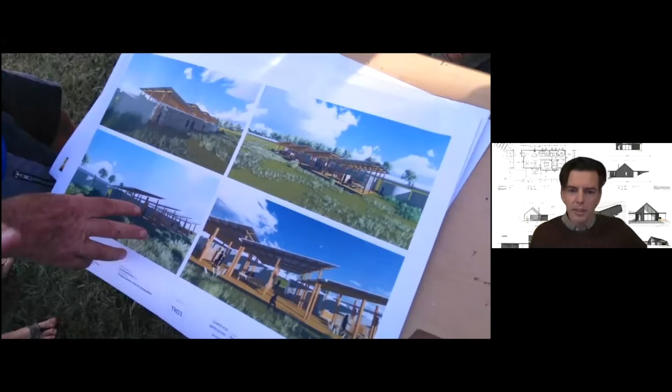Besides architecture, I organize various events like this architecture festival, kind of learning experiences for students and other architects, and building various assets for communities that might otherwise not get built - community museums, tourist hubs, things like that. Typically pro bono projects, halls. This is a little high school in Cambodia, a charity-driven project.

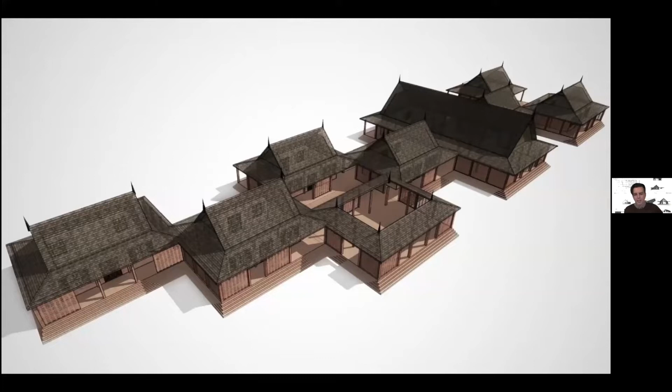And yes, that brings me to Architects Assist, which is an initiative of several hundred architecture firms in a bid to assist those affected by the recent fires.

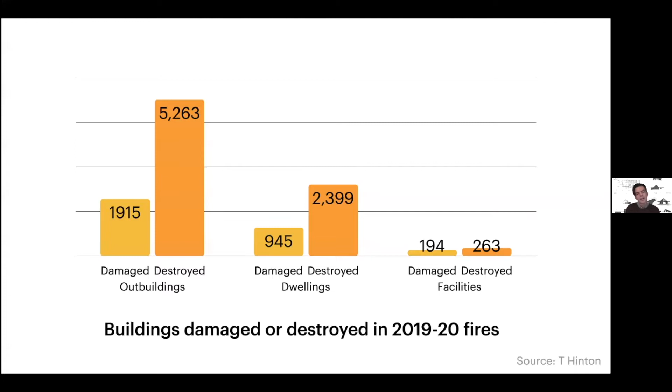As we all know, the fires in Australia are a fairly regular occurrence. They're quite devastating, happening every so many years. These last ones cost us about 5,000 buildings, 2,000 homes damaged. An interesting statistic that struck me was that only about 77%, or 3/4 of homes, are insured in Australia for these kind of events. So there's a staggering 23% of people left with next to nothing.

Many more were grossly underinsured after the fires. I'd dare say, from our own experience, these numbers would actually be far worse in those worst affected communities, because the best or most frequently insured homes would be in the larger cities. A large number of the people I came across during my work with Architects Assist, perhaps 50%, were actually underinsured or not insured at all.

So in reaction to the fires, about a year and a half ago now, we started Architects Assist, which was meant to be a platform for equity of access to architecture.

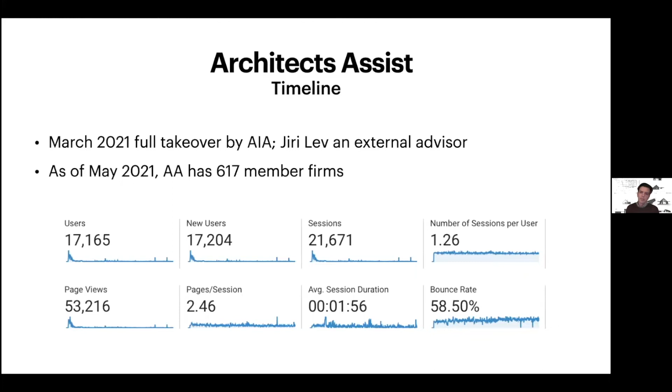One thing before I forget: if anyone is looking to engage one of our architects, do consider inquiring with those from your capital city. They tend to be more available for pro bono work than those few practices that are local to the regions worst affected, because of course they are more overwhelmed with all the work coming in oftentimes.

So how this works is basically the domain name or the website sits at architectsassist.com.au. There's a provider directory where you can find suitable architecture or other services providers via a search or a map. And then there's a simple assistance request form you can fill out, or ideally call the practice on a provided phone number. Another option is to call directly the Institute of Architects. Their number is in the contact section, and they will be able to match you directly with the most suitable practice willing to help. After you've made these initial contacts, the architect or architecture firm will contact you and assess your situation. They will make recommendations, suggest the roadmap, next steps, and of course, as appropriate, may agree on an extent of any free or discounted services that are available to you from that particular practice.

We have served all kinds of clients or clients in all kinds of situations. So, for instance, we had individuals who have been completely uninsured, basically left with nothing, living off their car if they even had the car left after the fire fronts went through. So, of course, those people would be served typically completely pro bono. They'd be also assisted in sourcing funds from a variety of grants or material donations and so on. But we also are happy to talk to people who have essentially fairly good financial security and have been insured well and have the means to rebuild, but are just looking for some initial advice and guidance, because of course navigating this terrain may be fairly confusing for anybody.

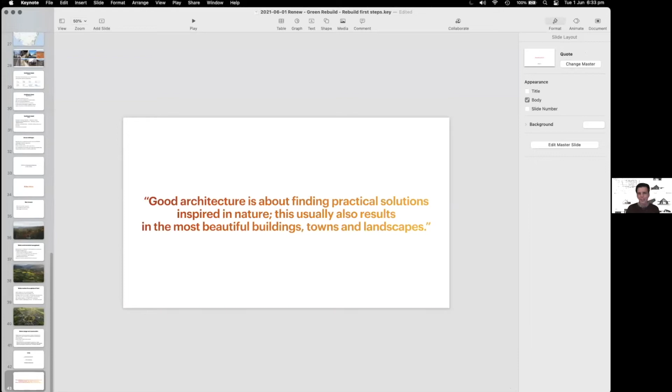Good evening, everyone. I'm Jenny, and as you probably noted in the introduction, I'm a scientist, not an architect. I've been specialising in energy efficiency in the housing industry for 12 years now, on the land of the Ngunnawal people here in Canberra.

I have no training in architecture, as I've mentioned, but I've got a great appreciation for what architecture has to offer. And that, I think, is because I grew up in two very modest but architect-designed homes as a child in Tasmania.

My parents were just a school teacher - my mum was a school teacher, and my dad worked in ground crew at the airport. When they had the opportunity to build on vacant land, they thought it was sensible to invest in some design expertise. That had a really significant impact on me that I didn't really appreciate until later in my career.

So I employ a talented team of architects who share my philosophy for smaller, smarter, sustainable homes. During January of 2020, several of them were directly impacted by the fires. They and their family members - several of them were trapped down by the coast.

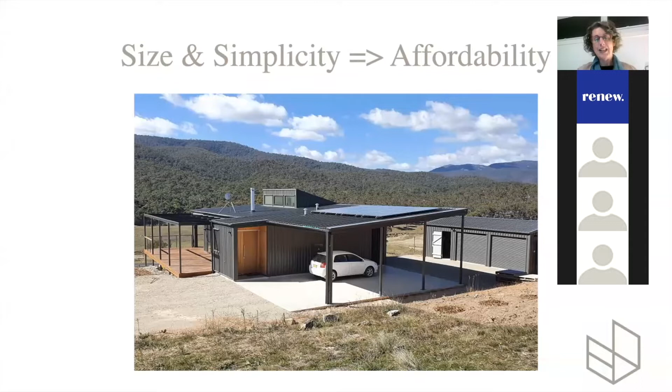Wrapping up, I strongly encourage you to work collaboratively with your builder and designer to ensure the design is affordable, comfortable, and healthy. And of course, don't forget to include input from energy efficiency and bushfire consultants. That's it for me. Thank you.

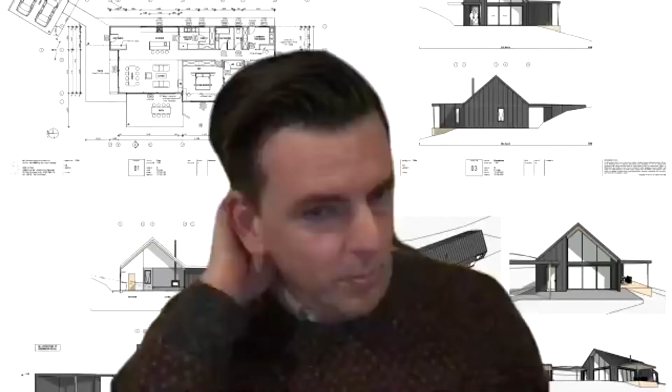And so trees to be in a - sorry, can I interrupt for just a second? I should say that BAL means bushfire attack level. Is that right? Yeah, so bushfire attack level. The main factors for bushfire attack level are the type of vegetation, how close it is, and the slope - whether it's downslope and how steep that slope is. So to be in a flame zone, you basically have to be almost encapsulated by high bushfire hazard type vegetation. It's a reasonably extreme situation.

If your house site was deemed as such, I'd say the first point of contact would be to talk to an architect and see what their opinion is. I haven't seen this particular site, and I wouldn't say that the standard itself operates in an overly blanket manner, but it's obviously a standard, so each situation is slightly different. The standard always errs on the side of caution - it's a bit conservative for good reason. But talk to a local architect, show them a few pictures of your site. They should be able to advise whether there's a chance of reducing that hazard, or sometimes the flame zone rating affects only 1 or 2 sides of the house. So there are all kinds of things you can do from there. But yeah, talk to a local architect, I would say.

Yeah, I'd say a local architect again, but also those bushfire consultants. In our case, if you spoke to our firm, we would put you in touch with a consultant who can do a really good analysis of the site, because as Jiri said, sometimes we've had a project where one corner of the house was classed as flame zone, but the rest of the property was not so bad. It can be very helpful to you as a client to thoroughly understand why the property has got that rating. It's all done with good intentions, but seek that expert help to better understand.

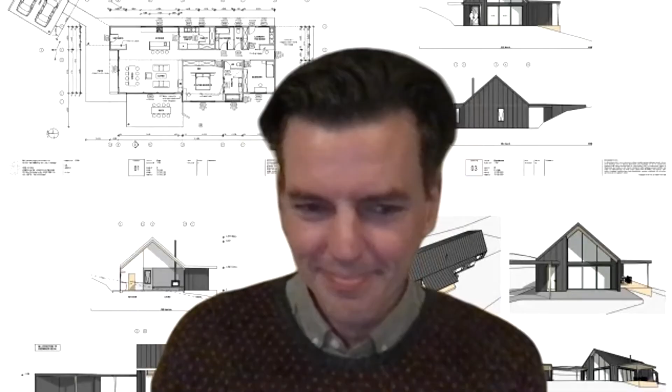Thank you, Jenny. Our house was not burnt, all our surrounding land was. We still wish to renovate our home so that it is more bushfire resilient. We're putting in double glazing and recladding the whole house with new weatherboards and insulation, plus better insulation in the ceiling. The existing extensions to the house date to 1990, need a lot of this kind of work, and they are on stilts, leaving room for embers to enter. The original 1910 house is a stone house on a concrete slab. We thought to put sprinklers on the roof and surround the house with a blue line impact sprinklers every so many meters, fed by a 90,000 liter tank of water and petrol pumps. Our property is in Blackheath, Blue Mountains of New South Wales, halfway down a steep slope and above a hanging swamp.

So, challenging site, there is a challenging location. What advice have you got for Eva? Do the best you can.

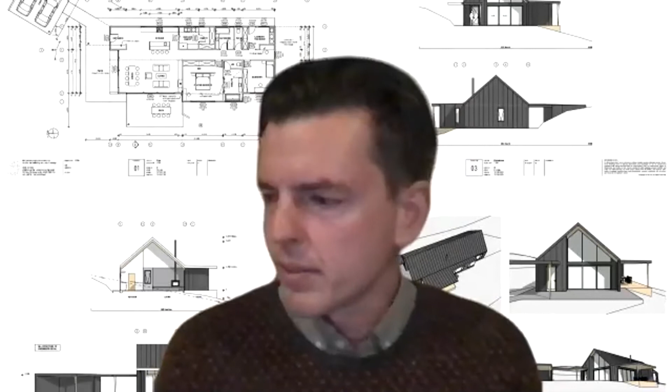Yeah, I agree with Jenny completely. But I heard petrol pumps, and I believe that diesel pumps are better for firefighting. Diesel doesn't ignite as easily, and so on. But yeah, it's always a fine balance between the investment and what you get for it. It never gives you complete security.

Also, as I've toured these tens and tens of villages and towns affected by the fires, I must say that a lot of the houses I've seen that were standing amongst houses that were not anymore were equipped with sprinklers. So I've actually been quite surprised how efficient they were in resisting the fire front. The thing is, the sprinklers themselves don't protect the house, they kind of act like an additional person or two with a fire hose. Typically they worked best if the house owner was still there defending, and the sprinklers basically enabled the other side of the house to also be wetted down as he was protecting, say, the side facing the fire, or vice versa.

An important thing about sprinklers, like I had a comment on the pumps, is that it's important that the sprinklers are a kind that creates larger droplets that resist the wind, because when the fire is coming through, you wouldn't believe the wind - many of you unfortunately would have actually seen it firsthand. So we need big droplets. These sprinklers are very different to those that you typically buy, and actually quite hard to find. I've been trying to find them online. It's pretty difficult to find a good sprinkler system for this sort of bushfire scenario, and also all the pipes and everything has to be ideally fire resisting, or copper or something expensive, so it can go quite high up in price as well. But yeah, anyway, my 2 cents to that.

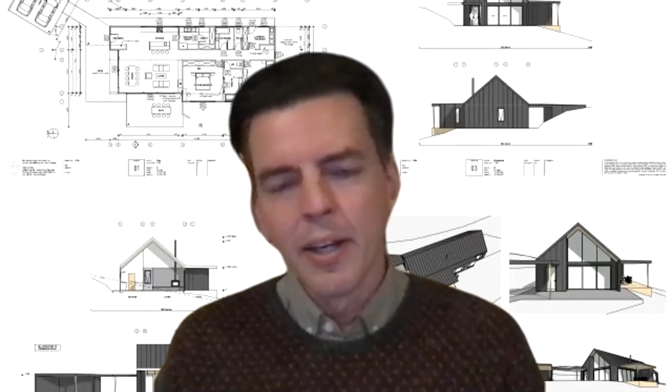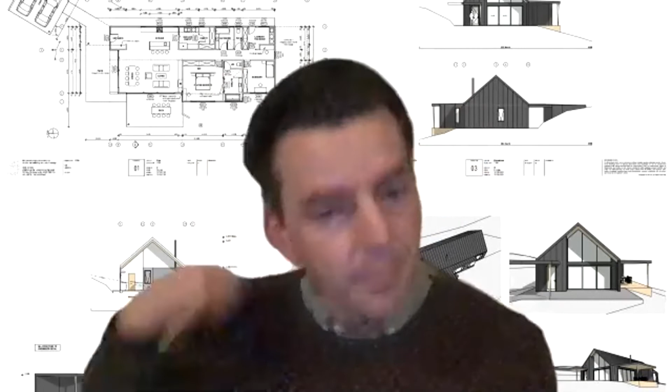It's hard to get things approved relying on your neighbors' continuous management of their asset protection zones. Another thing is houses I've seen burned down sometimes caught fire from neighboring houses. So if your house can be, say, BAL 12.5, low risk on one side, that triggers the other sides to be the same. But if the house next door is only 2 meters away and hasn't been lived in for 2 years, that's a serious risk and you can't do much about it. It's one of the really difficult parts of preparing for fire.

Related to that, you mentioned insurance, Jiri. Reading your insurance documents very carefully, because one of the things a number of residents found is that if there was no flame, there was considered to be no fire. So you could have melted cladding or other losses, but if you didn't have actual flame, the insurance was very challenging. So read the document very carefully. Even if you haven't been affected, it's still worth knowing what it says in there, hiding in the detail.

Our experience from the tour we did was incredible. So many people told us they were standing in front of their house spraying down things that were combusting spontaneously, and when the fire front passed, they realized plastic pipes and shovel handles had melted behind them. Our bodies, with the evaporative action of the skin, somehow have the ability to survive far greater heat than plastic weatherboards on your house. The whole house can be melting behind you while you're still fighting the fire in front, thinking everything's under control, then you look back and your house is kind of crying plastic.

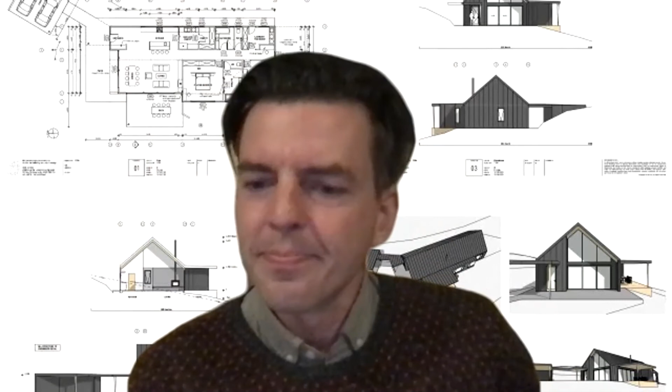Eva says one of the best ways to prepare and defend a neighborhood or village is to have a collaborative, such as we have here in the Upper Mountains called HUF, Heads Up for Fire, where a facilitator in an area keeps in touch with their neighbors and gets to know their particular circumstances and how to assist them in times of fire emergency. That's back to the collaborative approach, communities helping community. That's certainly my principal architect Sarah's experience in Corryong—I know that community is now much better connected, sharing information and resources.

Yes, really, really powerful if you've got that collaborative community support. Well, we've got one question here that I think we've really answered already, about changes to the building code. Are there any other final notes from Jenny, Jiri, and Paul in summing up what you've heard?

Can I just say one thing that's really, really nice and inspiring here, which is that so many people in the chat have made great suggestions as well. It's testament to an amazing community where everyone wants to help. And then there are other people here asking straightforward questions and wanting to learn, and it's really good to be able to match all of those people up. Thank you to everyone who's asked questions and made suggestions, because that'll help us improve the toolkit, add resources to it, and make sure it's actually serving what people need on the ground.